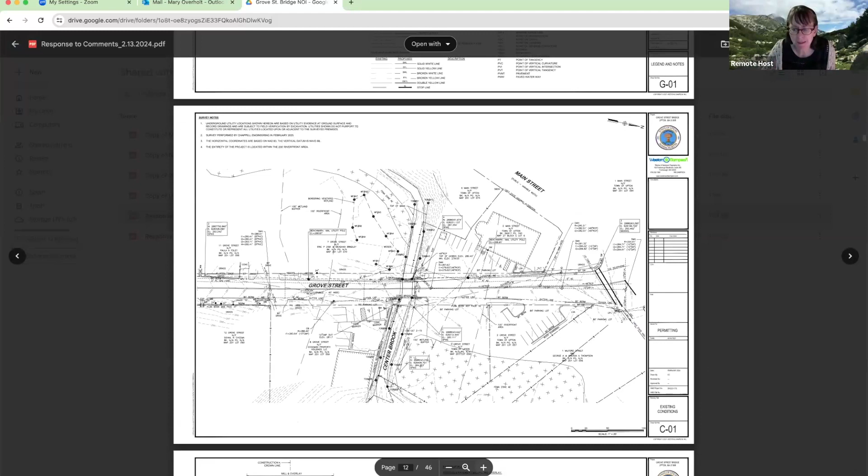See if I can find the plan. I think some of the changes are on this sheet, right? No, keep going. This is the existing conditions plan, I believe. Okay. Oh, it shows the flood zone though. Yeah, it does. Yep, okay. Tell me when to stop.

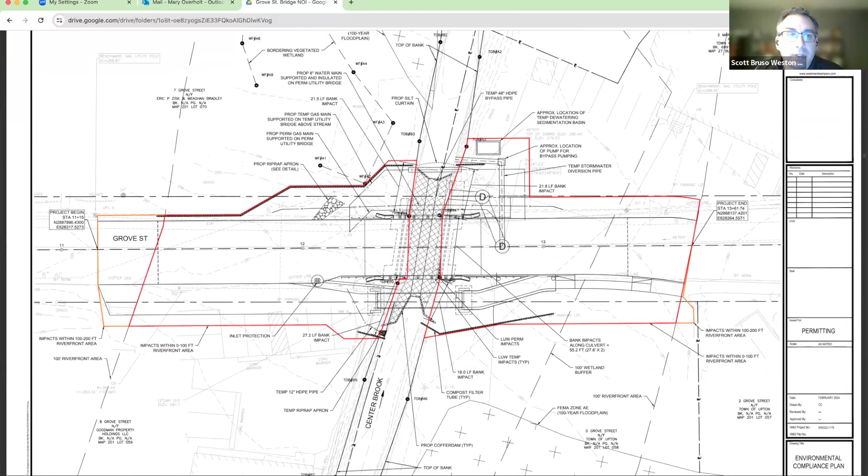So one, here this shows the revised riverfront area. The 0 to 100 feet is outlined in red, and the 100 to 200 foot buffer is outlined in orange. So it was just slightly reduced from what we had before on the form.

Yeah, I think when I started thinking about this, I realized that, and it may be that there's very little, most of the riverfront that you're altering is already degraded, most of it, but there might be a little chunk that's not. And maybe that's the area that Mike was focusing on. This small area in here is pretty natural, but the rest of it is pretty much already previously degraded. That was just something I wanted to point out to the board.

And here's the riprap apron for that one, the drainage that you were talking about, right? Correct.

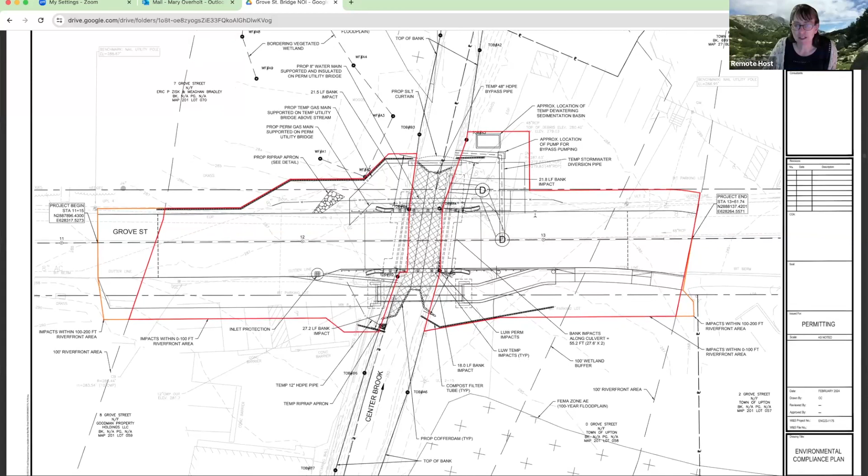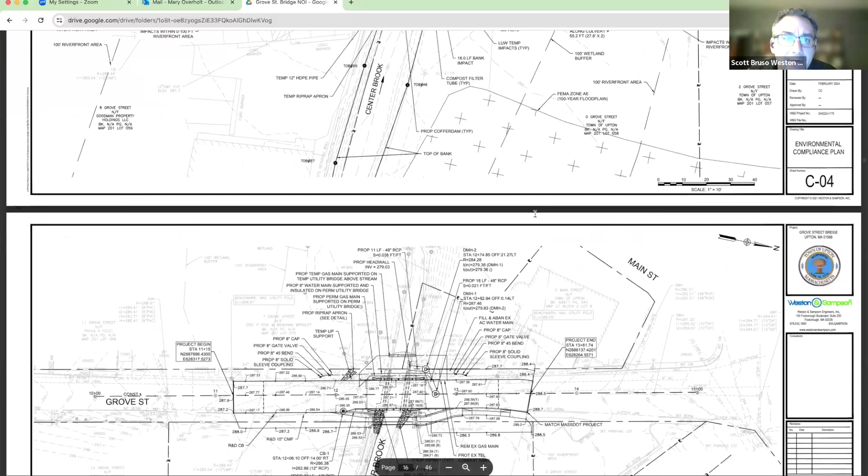Is there another sheet we should look at, or does this have most of them? This has most of it. If you scroll up a tab, go back down.

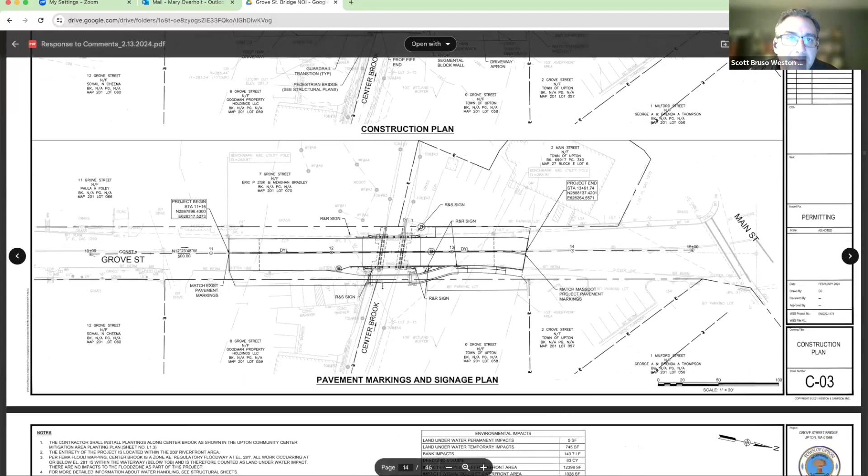Can you just show where the pedestrian bridge is on that existing plan? I think it's on this sheet before, up here. Yeah, so this is the existing conditions plan, but if you move your cursor down, along where your cursor is, that's where we intend to provide the riverfront mitigation area that the pedestrian bridge is going to take. And the tree will just be moved to probably about where your cursor is, that red maple.

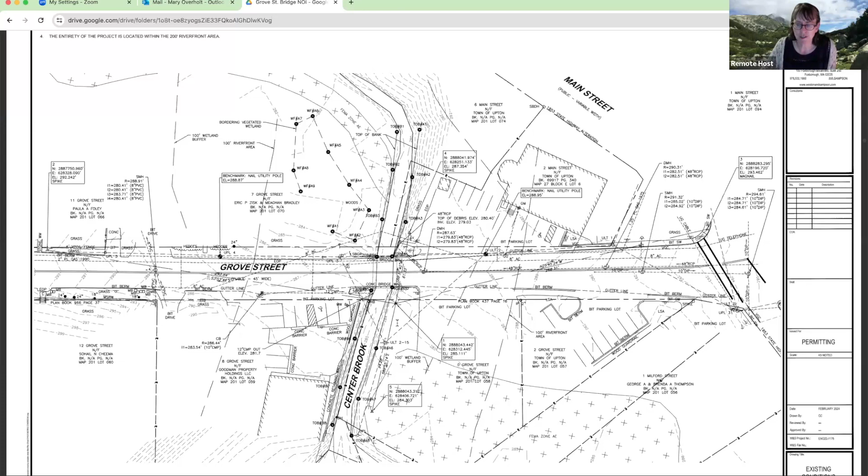I will get you that plan shortly hereafter. There's also the plan that shows the dormant stakings and the riprap. Yes, I believe that's a few sheets down. There they are. Yeah, okay.

I looked at your comments, responses, and there's also a DEP response too. Maybe you guys want to talk through the DEP comments? Yes.

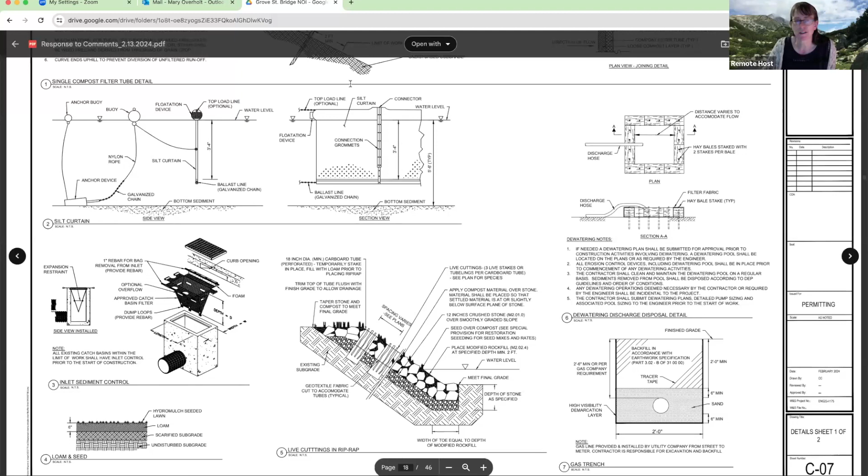So we received some comments from DEP on the NOI application. We received 3 comments. Comment 1 is about the stream crossing replacement. NOI proposals should be filed with the analysis required under 10.538 included. So as part of our response, we went through the alternative analysis points they highlight in 10.538. Specifically, they asked what the current span is, what the proposed span is, what the bank full width is, and how bank full width was determined.

So jumping down to the second paragraph, the existing horizontal clearance from face of existing abutment to face of existing abutment is 13 foot 8 inches. The proposed bridge will have a horizontal clearance of 16 feet from face of proposed abutment to face of proposed abutment. So it is an improvement over the existing condition at this point.

The bank full width is 17 foot 4 inches, determined by measuring the width between the top of bank flags B6 and A6, B7, A7, and B8, A8 on the upstream side, and the top of bank flags B3, A3, and B2, A2 on the downstream side, taking the average of the measurements. They all, for the most part, were between 17 feet and about 17 foot 8 or 9 inches. So 17 foot, in our determination, is what the bank full width would be.

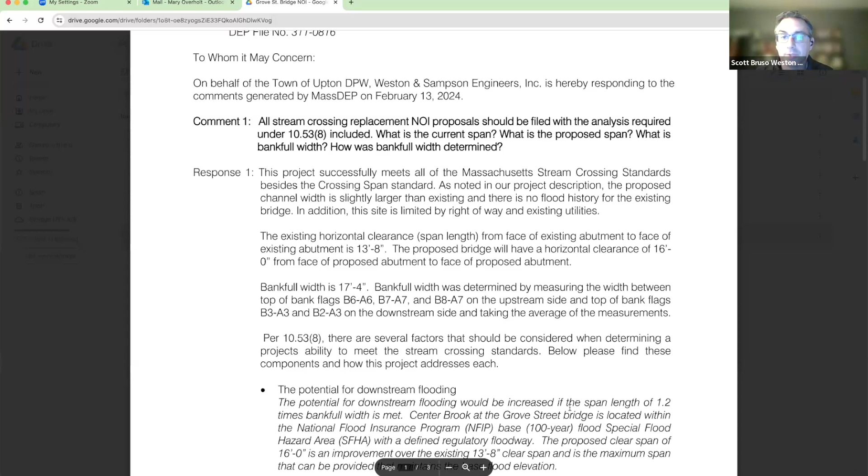Potential for downstream flooding: downstream flooding could be increased if the span length of 1.2 times bank full width is met. Center Brook at the Grove Street Bridge is located within the National Flood Insurance Program base 100-year flood special flood hazard area with a defined regulatory floodway. So the proposed clear span of 16 feet is an improvement over the existing 13 foot 8 inch clear span, and is about the maximum span we can provide that maintains the base flood elevation, since we are looking at a no-rise flood as it's in the NFIP.

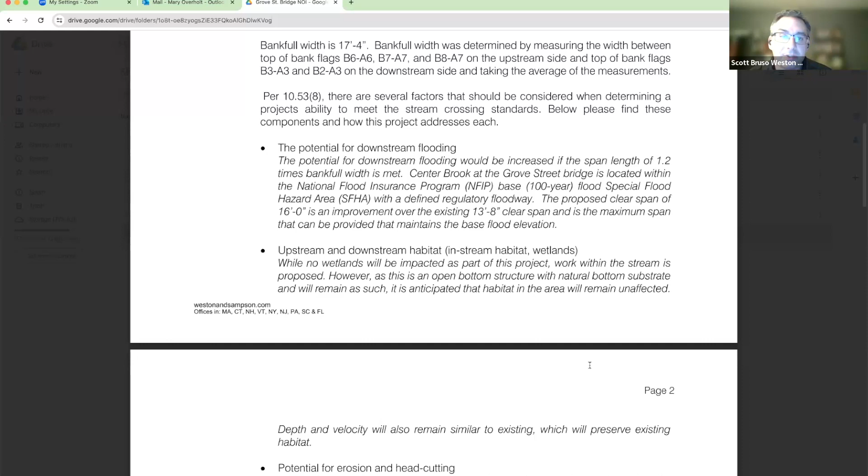The next consideration in the alternatives analysis is the upstream and downstream habitat, in-stream habitat, and wetlands. While no wetlands will be impacted as part of this project, work within the stream is proposed. However, as this is an open bottom structure with natural bottom substrate that will remain as such, it is anticipated the habitat in the area will remain unaffected. Depth and velocity will also remain similar to existing conditions, preserving the existing habitat.

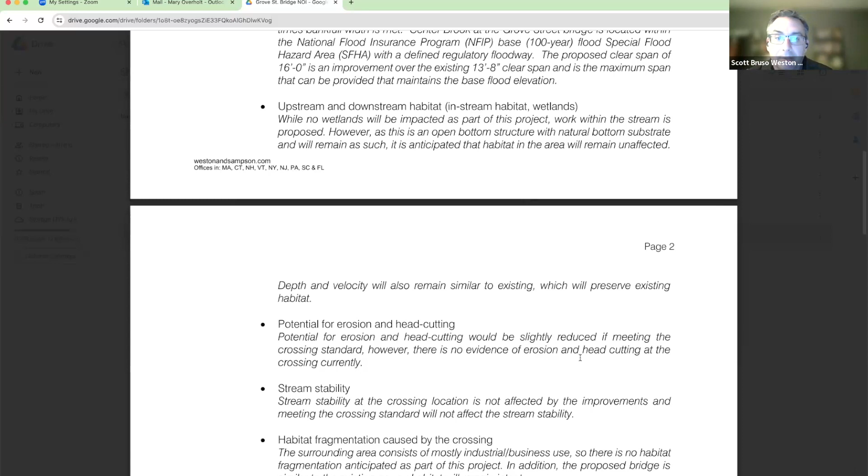Potential for erosion and head cutting would be slightly reduced if meeting the crossing standard. However, there is no evidence of erosion and head cutting at the crossing currently. Stream stability at the crossing location is not affected by the improvements being proposed, and meeting the crossing standard will not affect stream stability either. We had reoriented the culvert, so it actually does improve the stream flow.

Habitat fragmentation caused by the crossing: the surrounding area consists mostly of industrial business use, so no habitat fragmentation is anticipated as part of this project. In addition, the proposed bridge is similar to the existing, so any habitat will remain intact.

The next condition to review is the amount of stream mileage made accessible by the improvements. Stream mileage made accessible will not be changed, even if meeting the crossing standard.

Storm flow conveyance is slightly improved with the increased proposed horizontal clearance, but again, conditions mainly stay the same.

Engineering design constraints specific to the crossing include limited right-of-way, access to private property on the southeast corner of the bridge, utility conflicts including drainage, gas main, and telecommunications duct bank, and maintaining the hydraulic opening so that it will not affect the regulatory floodway.

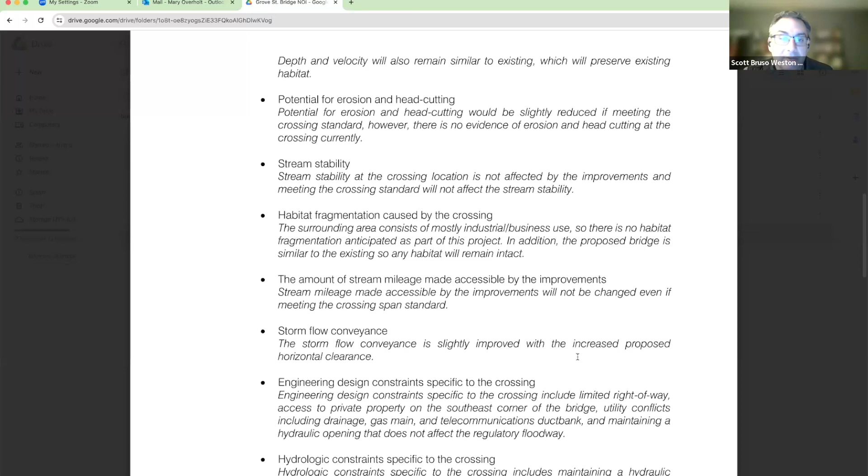The next condition analyzes the hydrologic constraints specific to the crossing, which include maintaining a hydraulic opening that does not adversely affect the regulatory floodway.

Impacts to the wetlands would occur by improving the crossing. If the crossing was improved to meet the crossing span standard, the design water elevation may be reduced, which may adversely affect the existing wetlands on the southwest corner of the bridge. The analysis is very limited, but there's potential to lower the water elevation in that downstream area.

So, potential to affect property and infrastructure. Meeting the crossing span standard would affect access to private property on the southeast corner of the bridge and would affect existing utilities, including the drainage, gas main, and telecommunications duct bank.

And then cost of replacement. Meeting the crossing span standard would increase the cost of the bridge replacement than what is currently proposed. So those are the items listed in 10.53(8) that we went through.

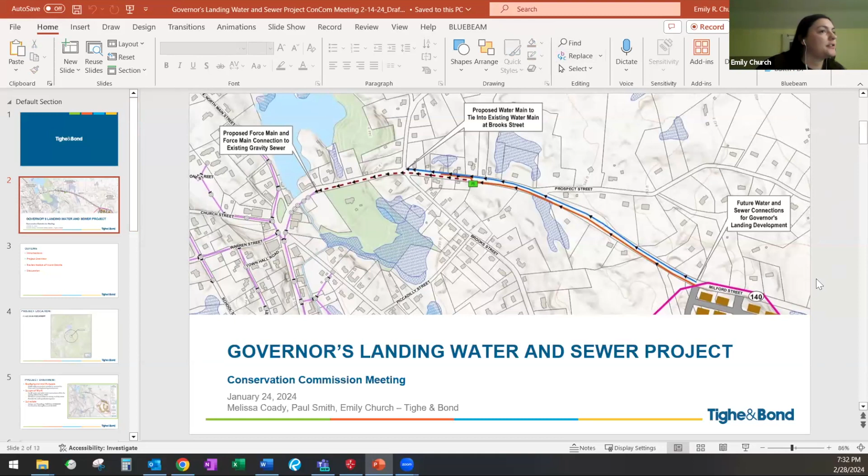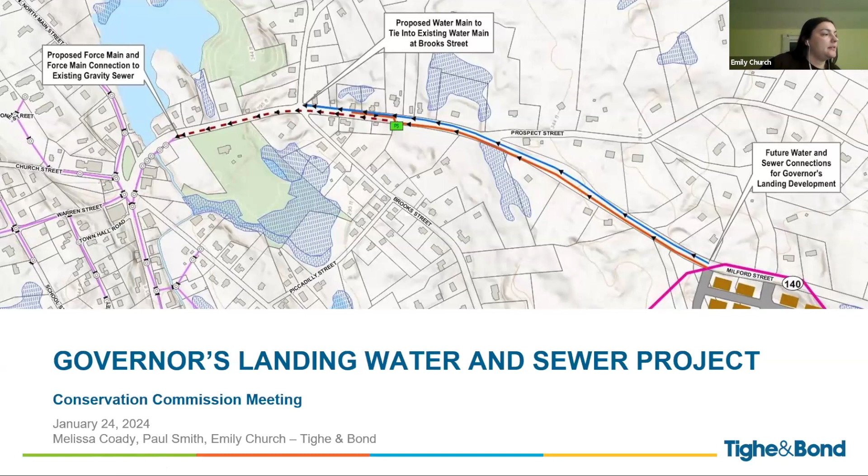This is the Governor's Landing Water Sewer Project. This is new utilities up on Route 140 on Milford Street. Everyone can still see this, correct? Yes, okay great. So with us today we have Melissa Coady and Luke Fromm, who developed the NOI, and then Paul Smith and myself, who are working on the design side for the utility work. Any of you guys feel free to jump in on this. So going through this presentation, we did the introductions, we'll do a project overview, we'll review the notice of intent details, and then open it for any discussion the commission may have.

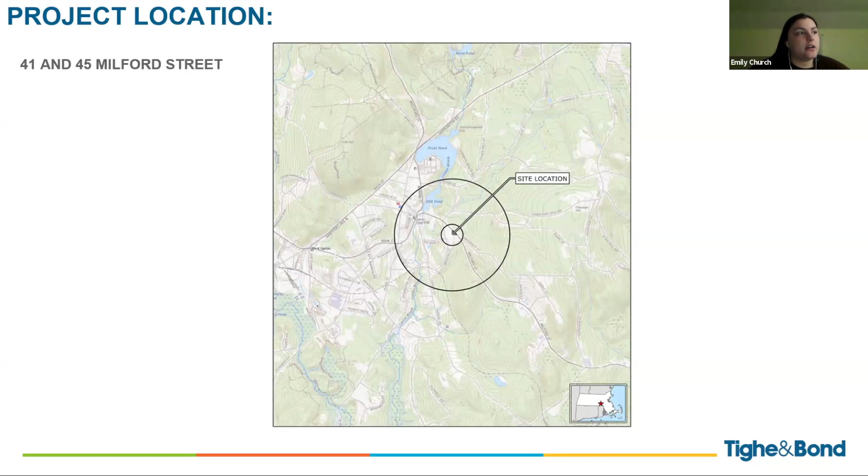Our site location is 41 and 45 Milford Street. We're coming roughly up from the community center, all the way up past Prospect Street, up 140. The whole purpose of this project: there's a new development going in up on 140, and the development needs new public utilities. So we are designing sewer and water connections for this project. Our schedule, we're still designing through here, and we're anticipating a construction season where we're trying to go out to bid in the spring, and then construct this in the summer and fall.

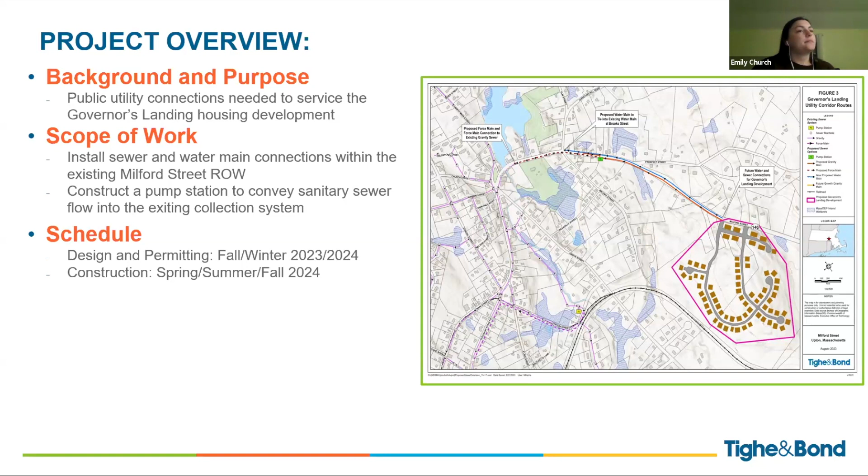Melissa, do you want to hop in on this one? You want to talk about the filing details and the jurisdiction here?

Sure. So, under the town's bylaw, there are alterations proposed within the buffer zone. Specific to the bylaw, there's approximately 2,000 linear feet within the 100-foot buffer zone of an isolated wetland. This is associated with the area around the proposed pump station, but not the pump station itself. Within that 100-foot local buffer zone, there is no disturbance within the first 30 feet. So the majority of that area will be stabilized, and post-construction it will just serve as the area around the pump station itself. Other activities subject to the town's bylaw, but exempt from the Wetlands Protection Act, pertain to the construction of utilities in the paved footprint of the roadway, and that was also characterized in the permit application.

So we've included some of the drawings here. This is our proposed pump station, right near the Gasco gas station. So our limits of work with the pump station - and Mary, I know we've spoken about this already - the 100-foot buffer zone does come through our pump station area, but we are not installing any impervious surface in there. There will be a driveway, a gravel driveway. So all work we're going to keep within the 100-foot buffer zone here. We have erosion controls where appropriate.

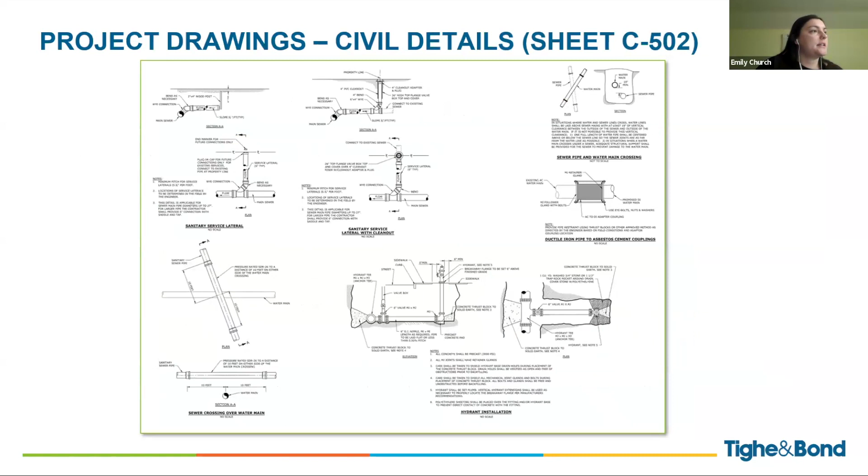And then we've included just some of our details here, standard details. If anybody wants me to jump back to these and look at them in more detail, I'm happy to do so.

So, does anybody have any questions? Mary, do you have any questions you'd like to ask at this point?

Well, one of the things we talked about was that not all the wetlands had been included on the plans, but I believe they have been now. Yes, we did update that. I know we were showing - well, we can kind of see on the slide there were a few more wetlands up in this area. We do have those incorporated now, and we do have appropriate erosion controls over there. That portion of the work is all within the roadway. So no, the only work off the roadway is the pump station.

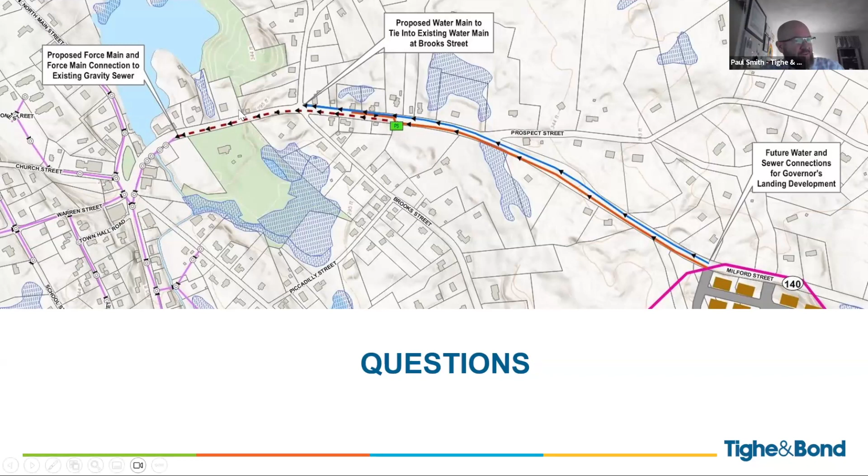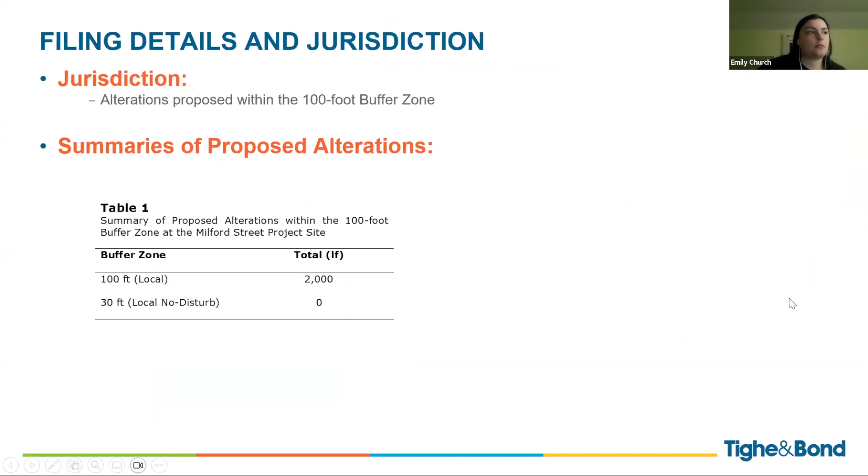And that work is shown in that second slide there, Emily, with the bottom viewport. Go back one more. Oh, sorry. That bottom viewport there, yeah. So west of Elm and Brooks Street is the area that we did not submit on initially, that we're showing now with proper erosion control.

Yeah, and I believe there is a DEP file number, and I believe their only comments were about showing erosion controls, right? They were looking for erosion controls in the area of the pump station. Is that another DEP comment in addition to the culvert crossing? I feel like I didn't look at the comments recently, but yeah, their first comment: project plans should be revised to include location of proposed sedimentation controls between the work area and down gradient resource areas. And then they mentioned the culvert.

Yep, and Emily, those were provided in the resubmitted drawings. For whatever reason, they're not showing in this plan view on the top, but we absolutely will be installing straw wattles within the buffer as required. And those were provided in the resubmission. For whatever reason, they're not shown right now.

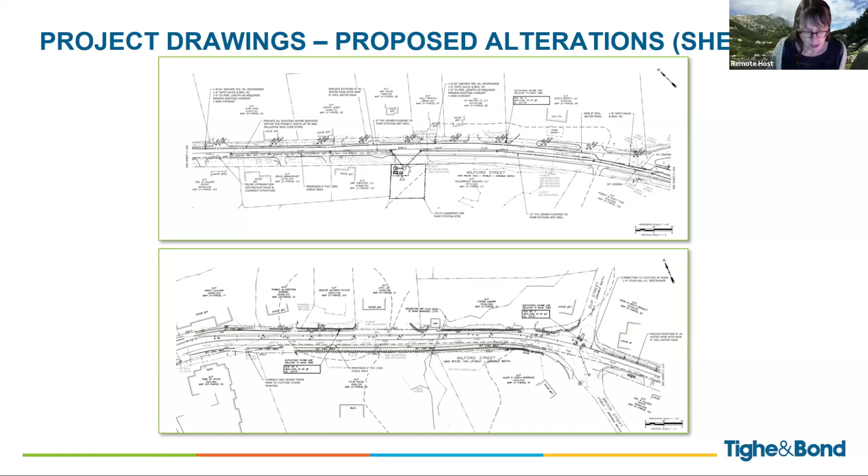My only other comment, some of the wetland flags were missing. I thought maybe they could be rehung before work is started, just to give workers an idea of where they are - the ones next to the pump station. Yep, absolutely. Yeah, most of this project is exempt under the state law, and I believe they're well within the town bylaw. So I think we're good to go ahead with it.

Thank you. Any questions from the commission?

Yeah, I have one - you mentioned straw, are you gonna use straw wattles or compost tubes? We have straw wattles specified right now. Okay Mike, we can use whatever the town prefers. We're open to compost tubes over straw wattles, not a problem.

Well, I'll give my personal opinion - I worry about straw wattles because most deployed in Massachusetts have poly netting. It's supposedly photodegradable, but it can still last a long time. If the wattles aren't removed, it's a persistent risk to wildlife. The compost tubes don't have that risk because they're not made partially out of poly webbing.

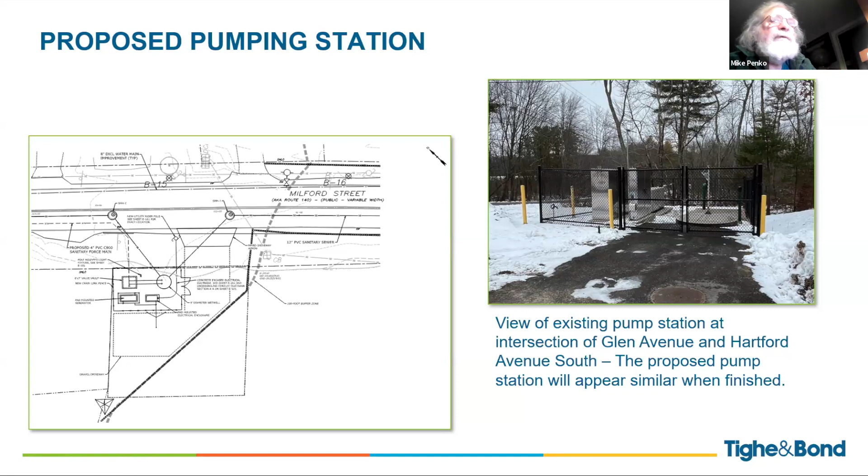Any other comments from the commission? I'm not sure if there's anyone from the public on - let me look at the list of participants. Bear with us a bit, this is the first time we've had to run a webinar like this. There are 4 attendees, I think most of those are for later hearings. Is anyone an attendee who wants to raise their hand? Otherwise there's no other comments from the commission.

Excuse me, I guess Mary, can we consider closing the hearing? Yeah, DEP number, I forgot - yes we have a DEP number, DEP commented so we have the number. Okay, this is the first time we've heard this, but it was supposed to come before us almost a month ago in January, and there was a continuance, and then we couldn't do it last meeting.

So, hearing that, I guess no concerns, I'd entertain a motion to close the hearing. So moved. Second. Any discussion on that? All right, hearing none, voice vote please.

Mike, aye. Tom, aye. Alan, aye. David, aye. Sandy, aye. Marcella, aye. Okay, I believe that's everybody. All right, hearing's been closed. Thank you everybody, thank you very much. Take care, folks.

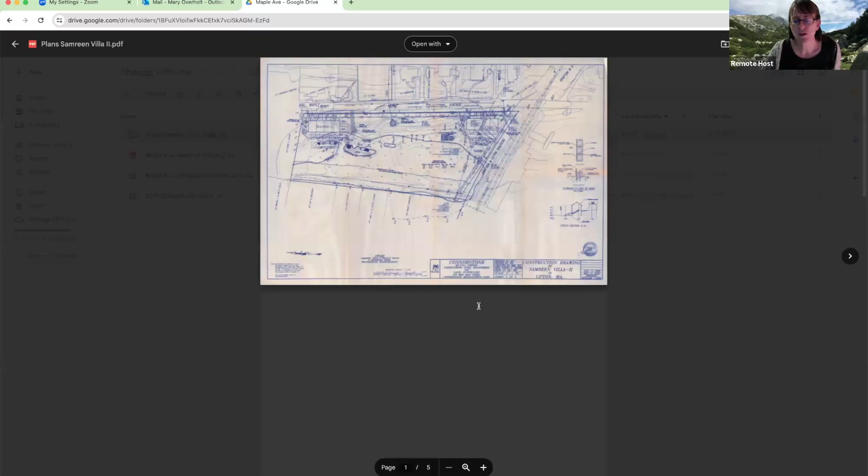Maybe I'll just pull up - and there's also this stuff down here, I don't know where this is coming from, but it could be any of the neighbors putting leaves and yard waste down there. That's in the wetland. So here's the plans for Samreen Villa II - these are old, go back to 2002.

I think what's interesting is, and this obviously wasn't ever implemented. There's supposed to be... so here's the building, here's Maple Ave. This is the wetland flags, this line here. There's also a flood boundary.

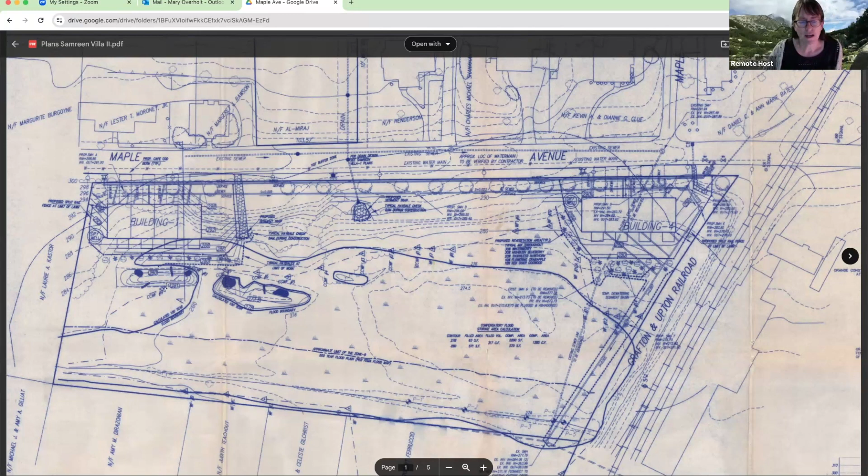What was originally proposed was that there would be a fence along here and nothing was to go back here. No lawn, nothing. Now a lot of the lawn is in upland, and this lawn has been here for a long time. This illustrates one of the problems: no certificate of compliance was ever issued.

So no inspection was ever done, and we never said, oh, you shouldn't have a lawn here, right when they put it in, and made them take it out or whatever. So this lawn has been here for a while, and I think the building residents enjoy it. But it does go into the wetland.

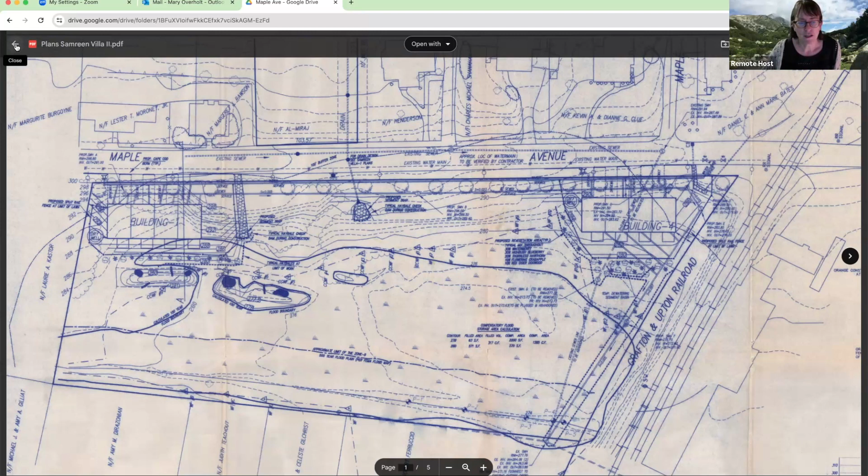So the question is, how do you move forward? What we should do - it seems to me like, at a minimum, we might want to ask them to move the fire circle out of the wetland area and stop maintaining this grass here because this area is wetland. Then the plantings here could maybe be moved to help delineate, and maybe there needs to be bounds in here. I don't know, but that's the conversation we need to have.

In terms of getting a certificate of compliance, it's these units, and then there's another one further south. I'd have to look through the order, but I feel like I looked at this a bit when we had another certificate of compliance request for Knowlton Circular. It seemed like most everything else was in order for this section - it was just mainly this encroachment here that was the issue.

Is there anyone here, any to represent the owners, or anyone to represent the owners? At the moment, hopefully they're allowed to talk. I'll stop share to make sure they can talk. Are you there? Yep. Oh, okay.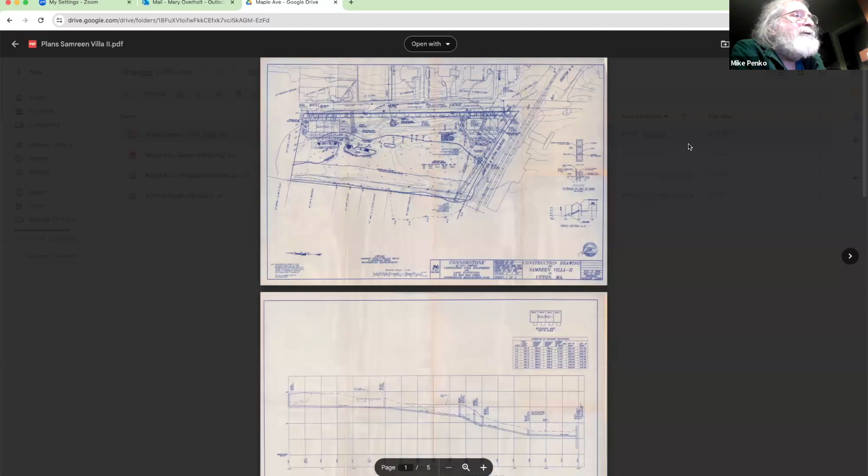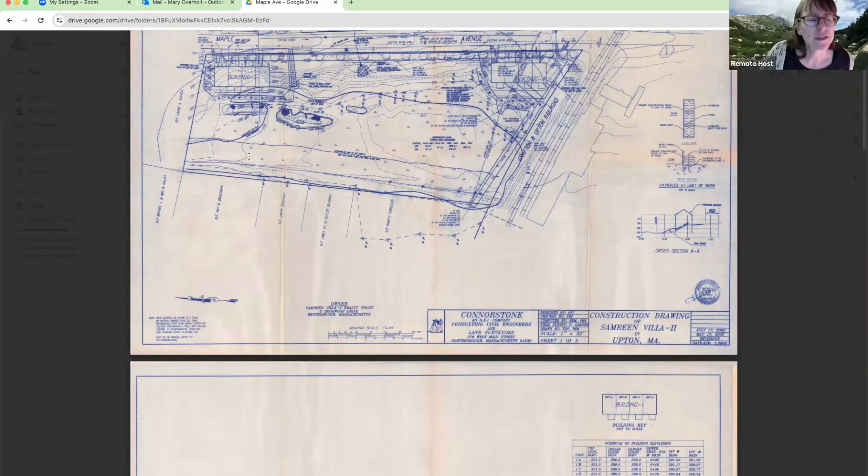Hopefully that looks like the fence that was constructed is right on the property line, hopefully, but you never know till you do a detailed investigation. I feel like between Samreen Villa and the neighbors behind, everyone just kind of used the stream as the boundary line. But it looks like that disturbance though is on the other side of the stream.

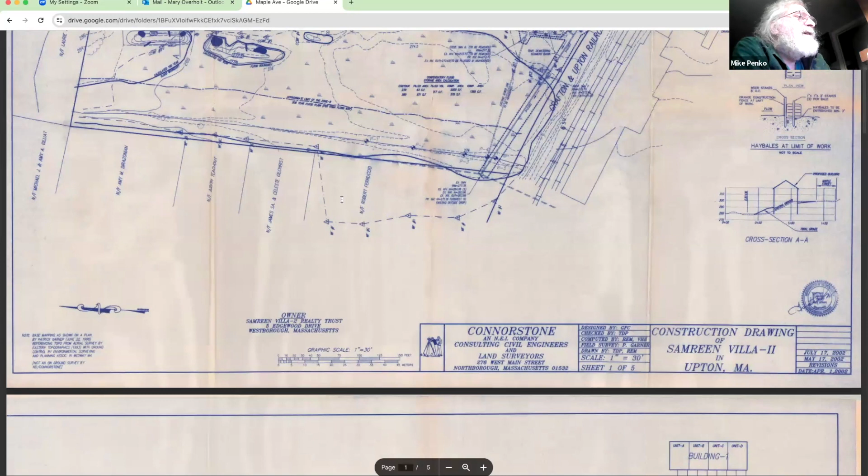Anyway, and the stream I think we believe is intermittent, so if anyone's wondering. So anyway, it's about 8:10.

We've got an RDA coming up, so I guess I'll entertain a motion from the commission to resolve this issue. I can try to make it myself, which you guys know how well that goes usually.

I guess I would make a motion to - and what's the address? It's 9 to 15 Maple Ave. I would make a motion that the homeowners association for 9 to 15 Maple Ave be allowed to maintain the existing fire pit and circle constructed within wetlands on their property, with the stipulation that wetland bounds be established to protect other wetland areas on the property, with the bounds locations to be approved by the conservation administrator.

Second. The motion has been seconded. Any discussion? All right, hearing none, voice vote please. Mike, aye. Tom, aye. Alan, aye. Sandy, aye. Marcella, aye.

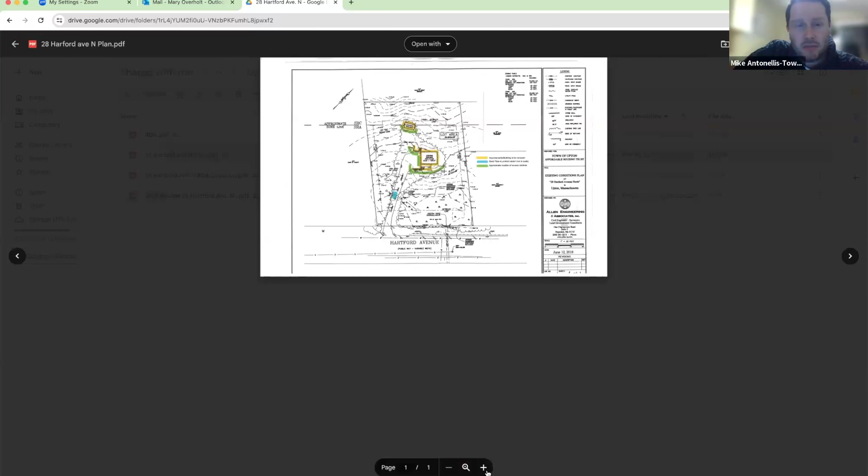Now, I provided, and Mary just had up on the screen there briefly, a survey done back in 2018. That survey is dated back when the trust put together the original RFP. I think that's from Allen Engineering. So we're lucky enough to have that on file.

And I was just able to quickly mark up that plan showing the yellow highlighted portions, which are obviously all the structures: the stairs attached, the concrete retaining wall that appears to be an extension of the foundation that's holding up grading to the rear of the house. All of that would be razed and removed, and then obviously there's a shed to the rear, as you can see as well.

The green denotes the location of erosion controls. We're open to whatever the standard for erosion controls is, whether it's silt fence, whether it's hay bales, or some combination of the two, or anything else. That's fine with us. It will all just get wrapped up into an agreement with a contractor who will ultimately do the demolition. We'll ensure that any of those conditions get met through that contract.

The green underneath the shed I placed there just for erosion control underneath the shed, because I didn't know if that would really result in any significant land disturbance that would cause soils to become loose from removing that. So that's there just out of caution, I suppose.

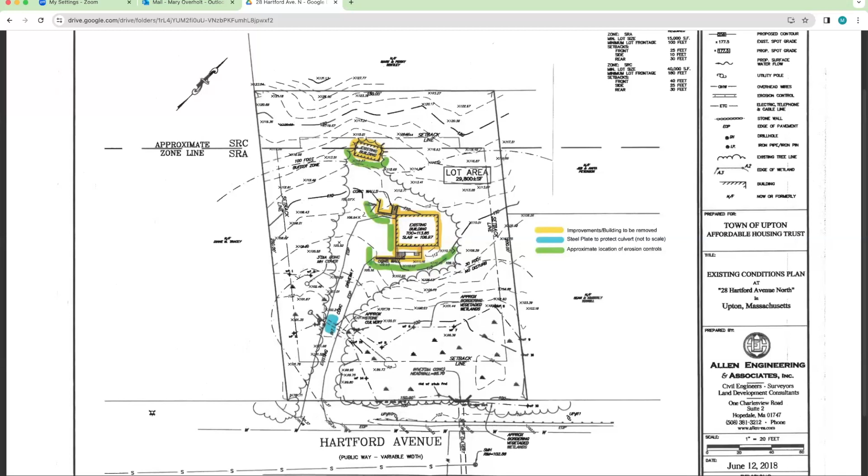Mary, would you like to go through your staff review, please? Sure.

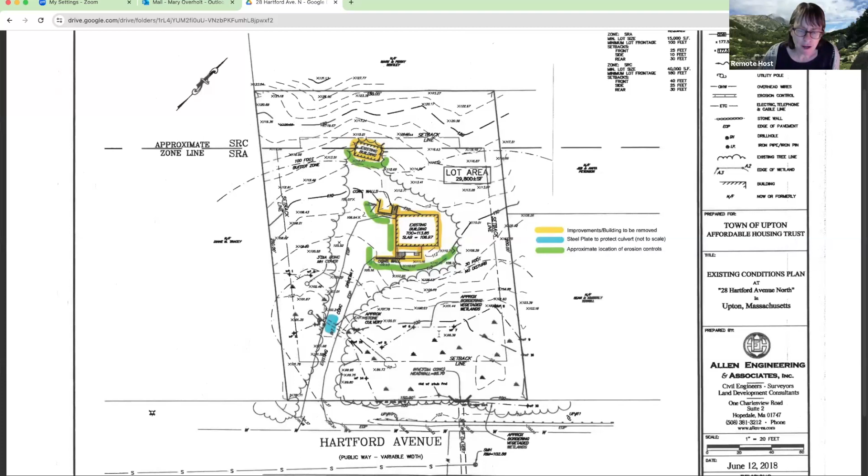So there's a wetland on the site, down here. It was delineated when the plan was done. Not all the flags are present on site, and I could not verify the soils due to the cold, but given what I could tell from vegetation and topography, the wetland line appeared to be accurate. There are very steep slopes going up the hill, so the wetland area is pretty well defined.

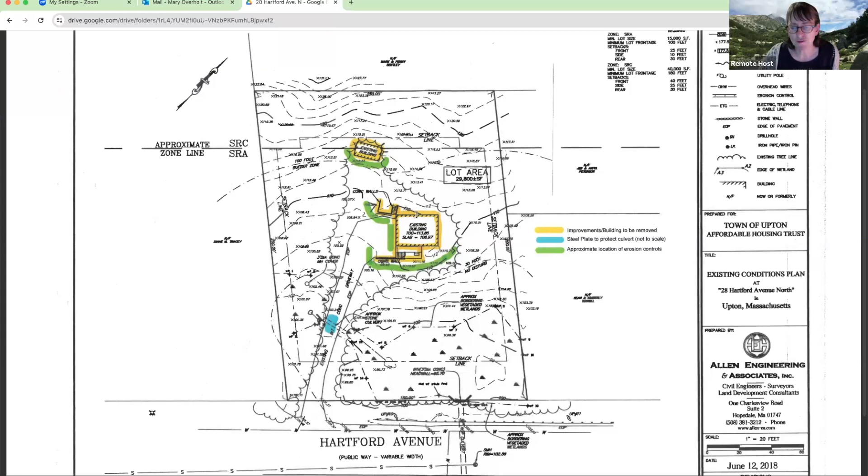My main questions were, would any trees need to be removed? The trees have grown in close to the house, you could probably see that from the pictures. And then just a question of stabilization, because the building is on a slope, it's pretty much a walkout basement situation, so how are they going to stabilize that?

So I think it should go down, and it can be done safely with erosion controls, etc. Any exposed soil, when done, should be seeded or covered with bark mulch, or even, as we were discussing today, maybe jute cloth. It's very wooded in there, so there's not a lot of light until new development can occur.

Through the chair, although that's all acceptable, whatever Mary suggests and the commission agrees with—placing down some sort of seeding or the bark in order to prevent significant erosion due to the slope—we're obviously happy to comply with that.

As far as removal of trees, I would imagine that, because the property's been left unattended, there has been growth that's come closer to the structure. So I would suspect that saplings and smaller trees will probably be removed if they're close, within 10 feet from the foundation, as it would have to be. But I don't think anything would be removed as far as what's noted on the plan for the existing tree line and the existing building envelope, so we wouldn't want removal of certain trees.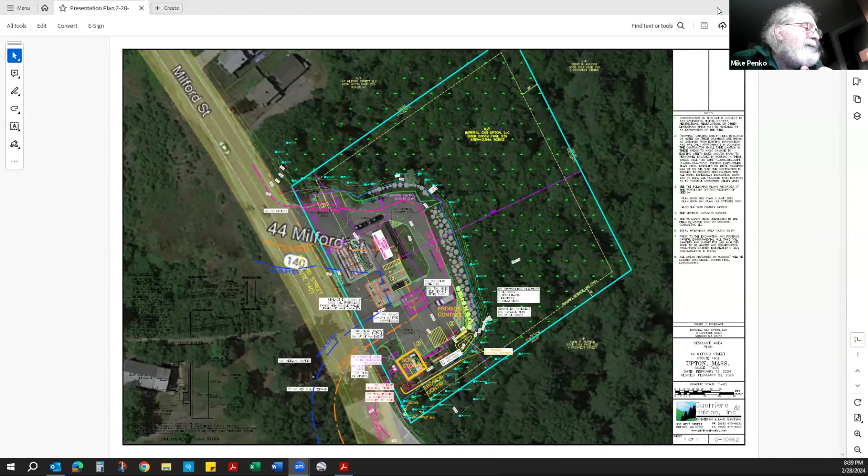Okay, Mary, staff review, any comments, please? Yeah, so... you want to? If you could stop sharing, John, please. Oh, sure, yeah. All right, let me figure out how to do that. I got it for you. Okay, thanks. My screen.

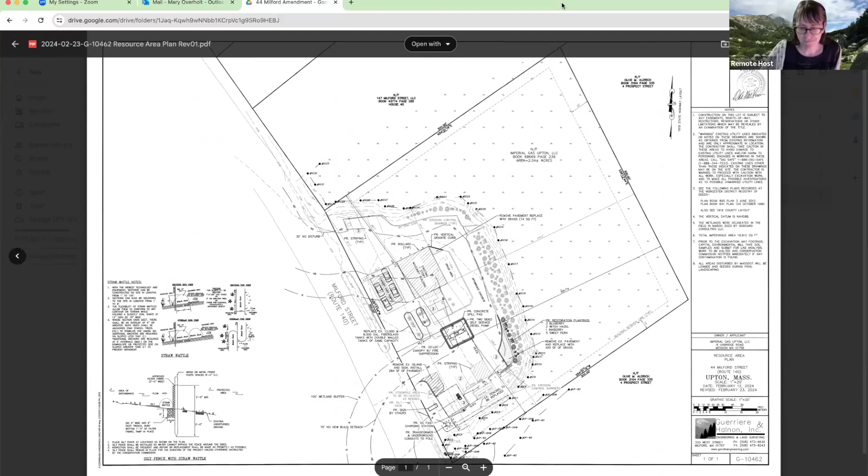All right, so they do have the erosion controls and no disturb zone indicated on the plan. Erosion controls are straw wattle and silt fence. This is in addition to the existing erosion controls, which have already been installed. New erosion controls surround the area to be planted with grass and the proposed electric vehicle charging station, and these erosion controls should be sufficient.

The diesel canopy and pump will require a waiver from the bylaw for our 75-foot no build. It's about half in and half out. It is all within previously disturbed area and is not adding any impervious area to the lot.

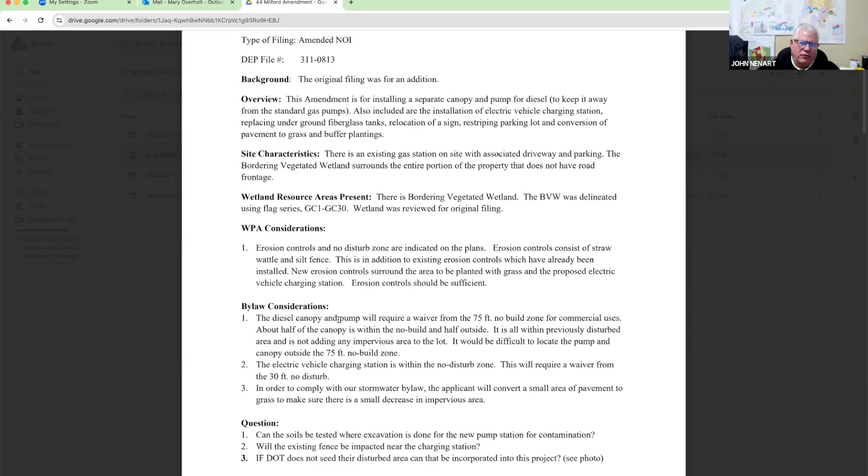It was my sense that it would be difficult to put the pump in another place, John, in the area. It seemed like that was a good spot for it. Again, it was basically the only spot that wouldn't disturb traffic coming in. If the trailer is still parked there, traffic can still get to the front pumps. If we shifted it either way, it clogs things up.

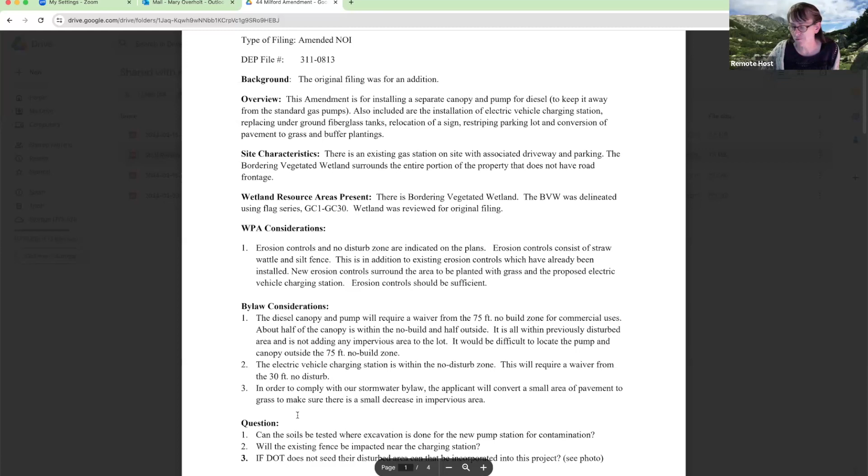And then the electric vehicle charging station is also within the 30-foot no disturb, but it's in previously disturbed area. So this will also require a waiver from our bylaw. It didn't seem like... I was wondering if you could pull it a little bit out of that no disturb, but it just seems like it makes it more vulnerable to being hit by a car or something, because you'd have to pull it closer to the roadway or closer to the access to your parking lot to get it out of there. So probably it is in the best spot for it to be potentially.

The change in the pavement, I thought that was positive, putting more grass in the no disturb area on the other side of the parking lot.

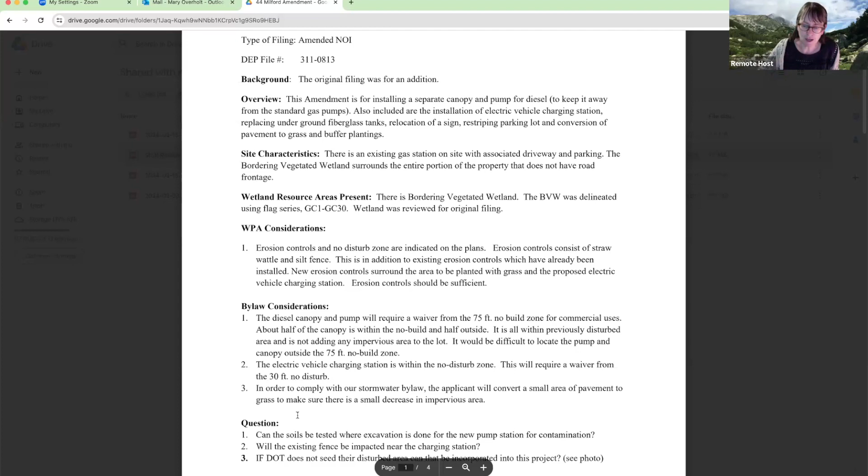And I talked with John about the soil testing, and John, do you want to explain what you explained to me about what gas stations are required to do? Yeah, so we have a full monitoring system there. We do daily logs of every gallon of gas. The site had a clean 21E. They had a spill, I don't know, 30 years ago, and it was cleaned up. It has a clean bill of health. There's no restrictions on digging or anything.

We will be hiring Global Industries. It's a petroleum contractor to replace the tanks. Any digging they do, if they find anything that smells like petroleum or they see anything, they're required by Mass General Laws 21E to report it immediately. I think it's a step that doesn't need to be taken, and it's a cost to us to do borings down there. It's about $5,000 for the drill, costing somewhere between $5,000 to $8,000. I did call my environmental company. He basically said he didn't really ever hear of doing that before on a clean site.

I also talked to our environmental lawyer, and he said the conservation commission really can't request us to do that, it's out of their purview. So I just want to show the board we have not had any spills. The monitoring's done, every drop of gas is accounted for daily, in the tanks and out. We haven't had any negative reports filed anywhere, and the site has been cleared under a 21E before. So I think it's an unnecessary cost and an unnecessary step. Once Global gets in there, if they find anything, they have to report it immediately anyway. By law, they have to do that.

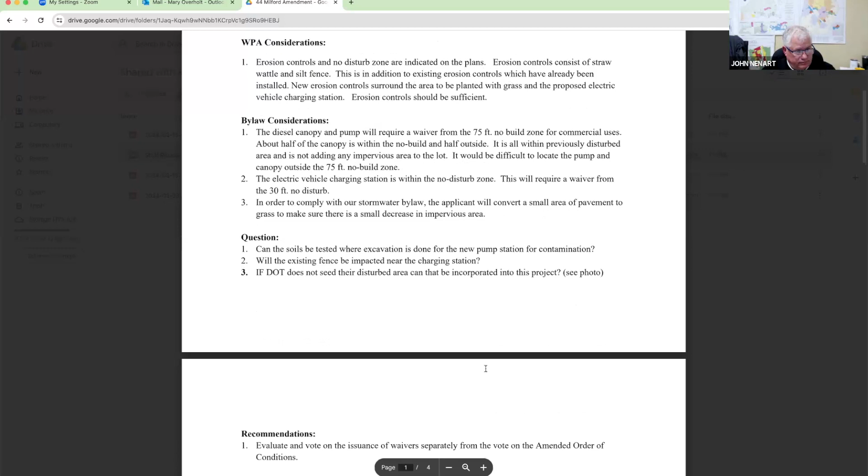So it's going to go right along that curb and edge there. We don't plan on changing that curb and edge. And the fence will be replaced in exactly the same spot — it'll probably be a white 6-foot vinyl fence instead of the cedar fence there.

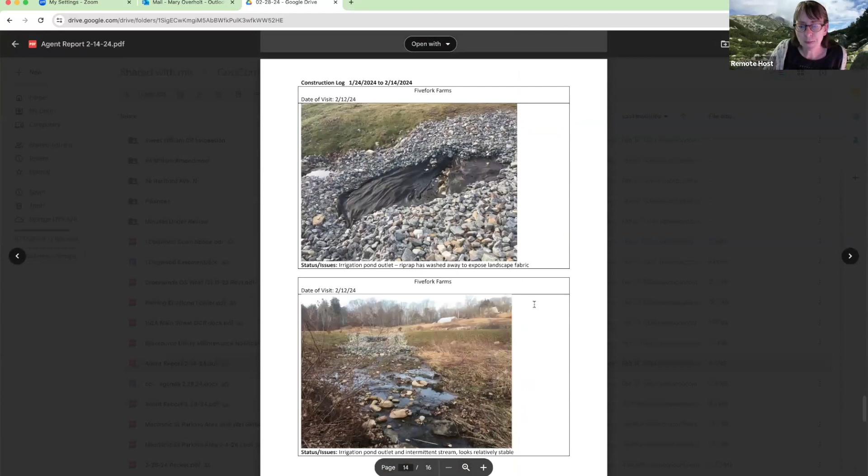So this is the spillway for the new pond that the rock protection did not hold up during one or both of the storms we had late last fall.

Mary, I'm just going to say what I remember you telling me, that the NRCS is aware of this, and they're going to be preparing a plan to mitigate for this.

It looks like one of two things happened here. Either there was a design flaw, they didn't require large enough stone. The plan called for 5-inch D50, meaning by weight half of the stones were supposed to be larger than 5 inches in size, or else there was a problem with the actual stones used, that they were smaller than spec.

Mary, I personally would like them to submit a repair plan before they make the repairs. They're somewhat lucky, because if it wasn't for this matting, the erosion control matting and geotextile underneath, they could have had a cut and lost the pond.

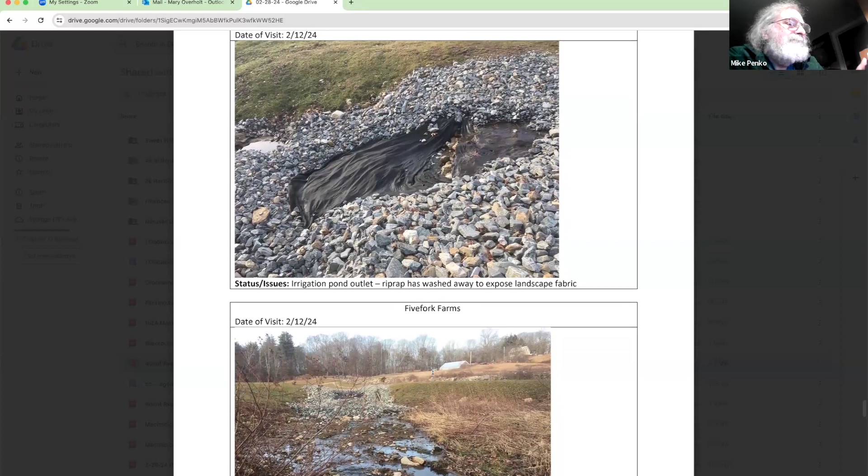I suggested to Grace that maybe while they're waiting for a plan, I don't know if the board feels strong about this, but at least take some of the rock that's spilled down and throw it up to get a little cover on that to stabilize the fabric a bit. Whatever protection they can provide in the interim would be good.

And hopefully they will have this repaired before the upcoming hurricane season, which is basically July, August.

Mary, was there any response on our part to Grace's letter regarding the stone walls and the added stone, and, for lack of a better word, the yard waste that's being piled up?

Yeah, we need to talk about it tonight. That was on the agenda last meeting and we never got to it. It's a little further down. Or if the board wants to do it now, whatever. No, I just thought as long as we're hanging out at Sweet William or Fivefork Farms.

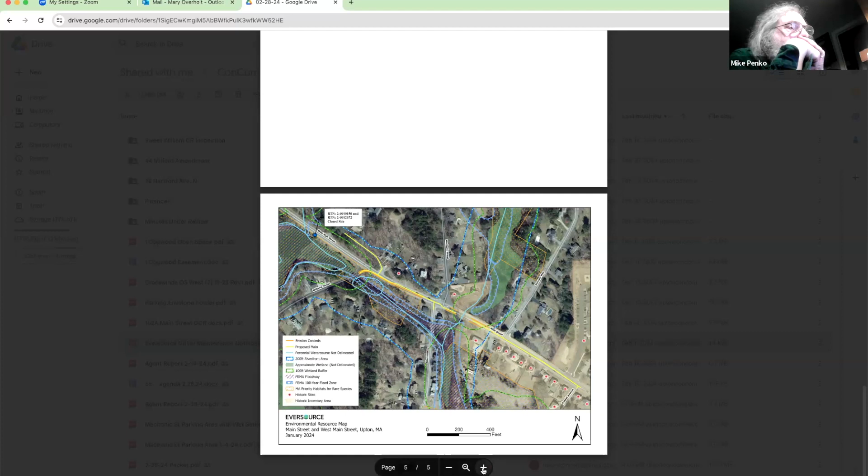This is Bill - actually, one of the Eversource employees stopped in to talk to us. They determined that because of the location of the water line, they had to close lanes, and that wasn't part of their original permit from MassDOT. So I'm sure they're trying to resolve whether or not they're going to - apparently the MassDOT solution for that would be to work at night, which is just bad. In any case, they're probably still trying to resolve exactly how they're going to do the work, so we'll keep our eyes open to see when it actually starts. And that's that.

Okay, next, maybe this could come off as a discussion item since Bill has already provided an update on the Lake Wildwood open space opportunity. Bill's updated that.

Sweet William Farm, Fivefork Farm, CR monitoring. I think this is where the situation with the stone wall comes in. Marcella and Laura from SVT did a CR monitoring walk last fall, and Laura flagged placement of some stones and other debris on an existing stone wall adjacent to one of the fields.

We sent a letter to Sweet William asking them to come talk with us about it. Then Grace wrote us a letter back asking us to tell her, basically, tell us what you want us to do, tell us where the problem is. I personally wish she would just come in and talk with us rather than going back and forth with letters and emails.

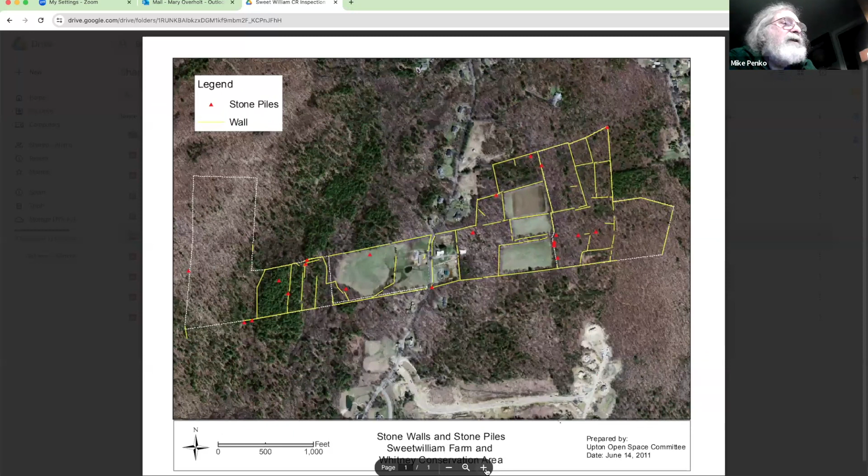Thank you, Mary. This is from the baseline report. The triangles are existing stone piles that we noticed when we were doing the baseline report. Some of them are basically at the intersection of two stone walls, like at the corners. Others are all over the place.

We did lose, after I saw this, the one that's within the Sweet William Farm field, that was just leveled or regraded. I bet we lost that one. It was like a stone grouping rather than a pile, but I think no one really thought of that. I'm sure it's no longer there.

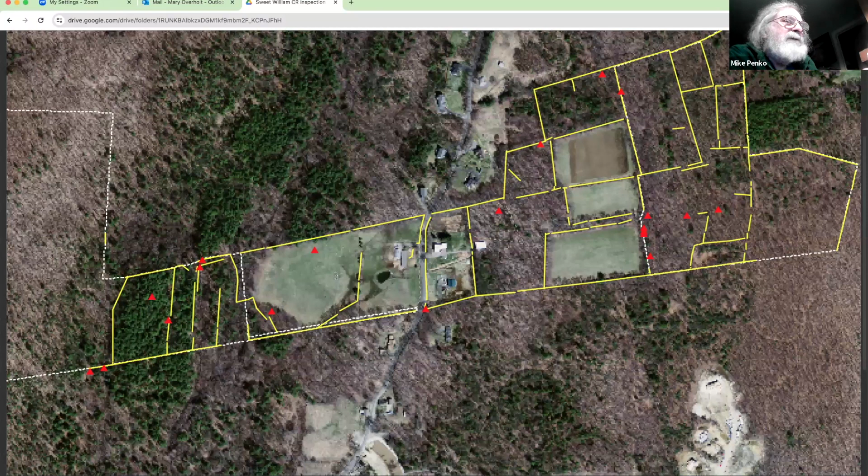But anyway, there's a history of people creating stone piles here from when they were clearing the fields. One thought might be to give Grace the option of identifying a couple of areas where she could create new stone piles. The problem's probably only going to be on the east side now, since they've taken care of the west side with their stone burial project last summer.

Well, at some point, once they start farming it, I don't know how thick a layer of topsoil they've got there, but stones are going to start working their way up. Yeah, they're going to be looking for a place to put those. That may be a ways in the future, but it's certainly something we should make sure they consider.

Well, Marcella—oh sorry, no, go ahead Tom. Marcella, didn't you mention something like sad little walls or something? Couldn't they add to the sad little walls, whatever they are? Would it be a problem? They don't seem like they're that significant.

To me, I don't think of it as something that's really a historic structure—it just seems like this low little thing and you can just throw more rocks on it, but I haven't seen them. I just remember you referring to it as that.

Well, I think it's up to us to decide how important those sad little walls are—most of them are no more than shin high, knee high maybe. In some places they're not very high, not holding up particularly well. If we decide they're not that important for preservation, then that's our decision as a committee. And SVT—yeah, exactly, because they co-hold the CR.

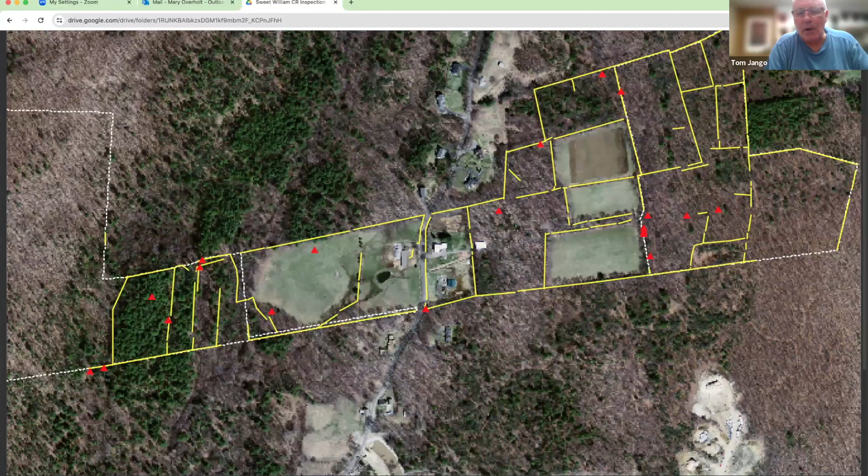But what do you think, Marcella? I mean, I haven't seen them, I just remember the description. So do you think that's reasonable, or not reasonable? Well, I'm kind of torn because I don't want to get in the way of their farming operation. But we mapped them because we thought there was something worth making note of. And I don't necessarily have a problem with them adding to it—historically, that's what people did.

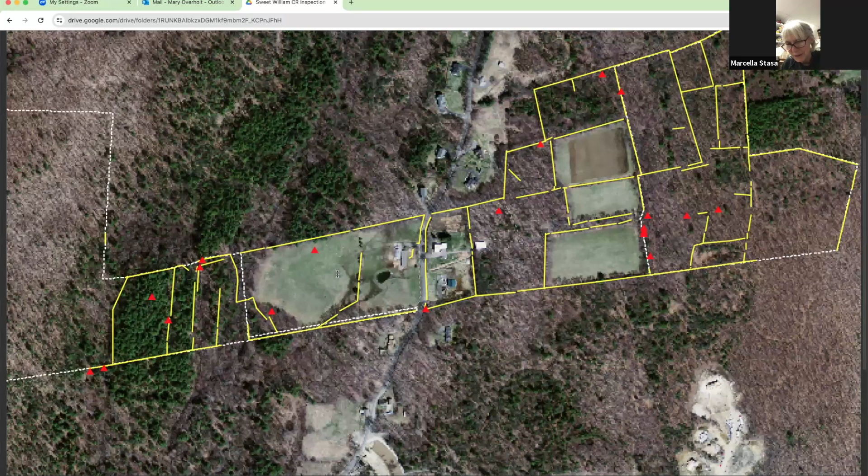They added stone to the surrounding walls. But if you look at what they have there now, it's more like rubble has been dumped on top of them. It's not like they're building the stone walls up, they're just dumping the stone.

That isn't consistent with the historic look that we were wanting to preserve. Again, that may not be important. We may decide with SVT that it's more important to make sure that their operation functions easily.

There might be a need to refine the classification, like sad stone walls and very sad stone walls. I would call these as sad stone walls. We saw some that were barely walls that we mapped, but these were... when you compare it, there's some spectacularly beautifully built, lovely boundary walls, especially that are, you know, I wouldn't want those touched.

And to discriminate and call it a small sad wall... well, you know, we were getting a little punchy out there, measuring every freaking wall and every gap in the wall and getting points.